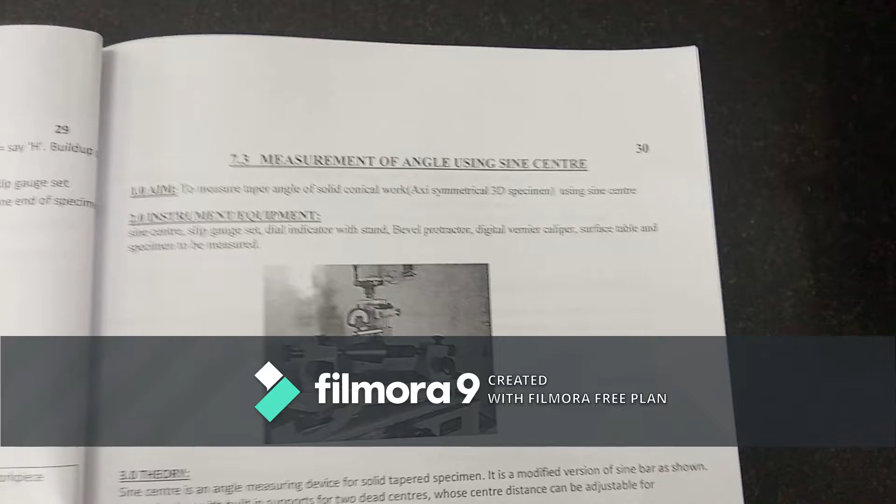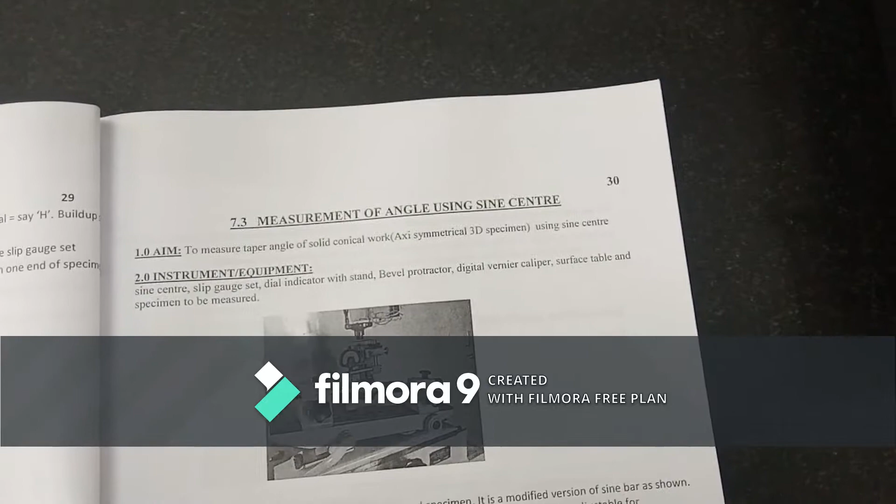The aim of this experiment is to measure the taper angle of a solid conical work specimen using the sine center.

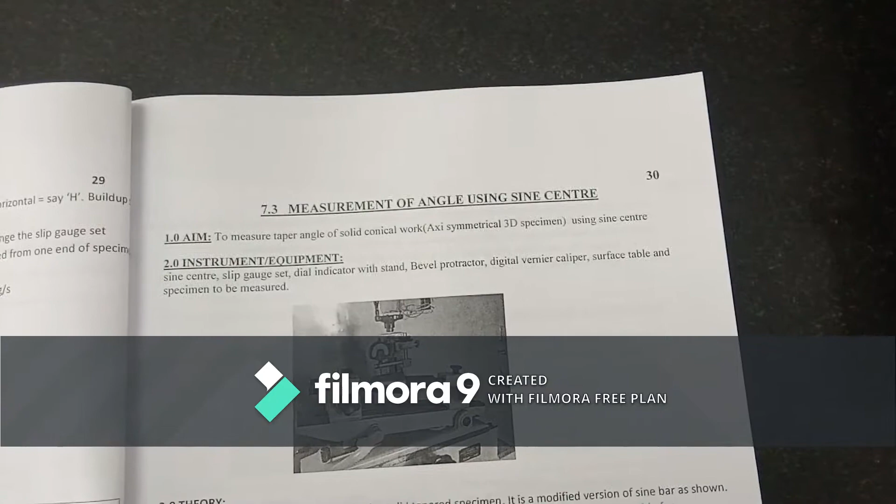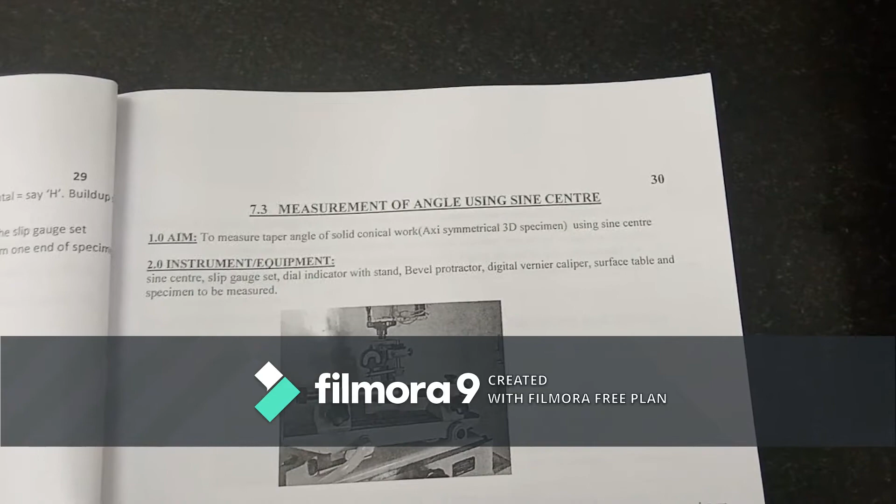The equipments used to measure the angle are: sine center, slip gauge set, dial indicator, bevel protractor, digital vernier caliper, surface table and the specimen. These are the instruments we are using to find the angle.

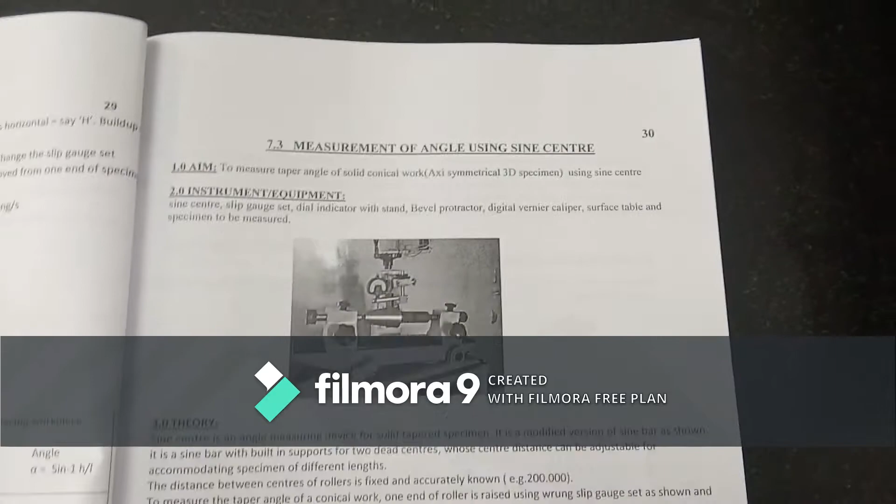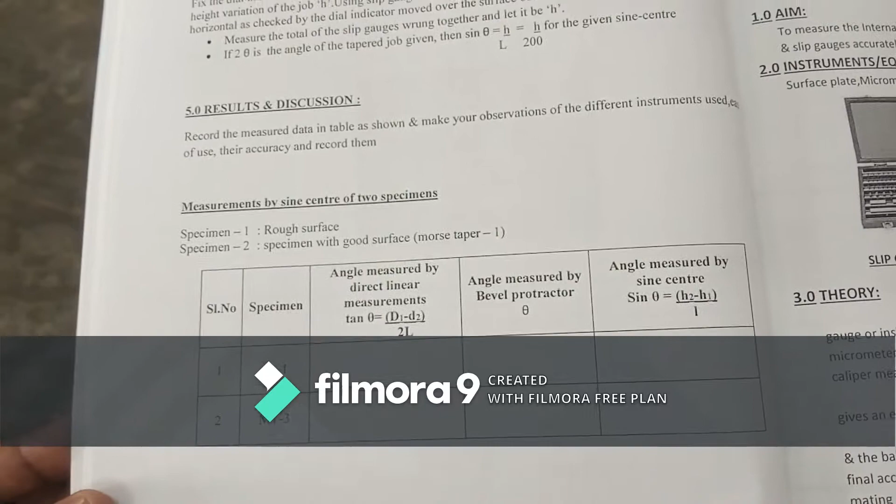Now we move on to the tabular column. The first column has the serial number, the second column is for the specimen, where you need to draw a sketch of the type of specimen you are using.

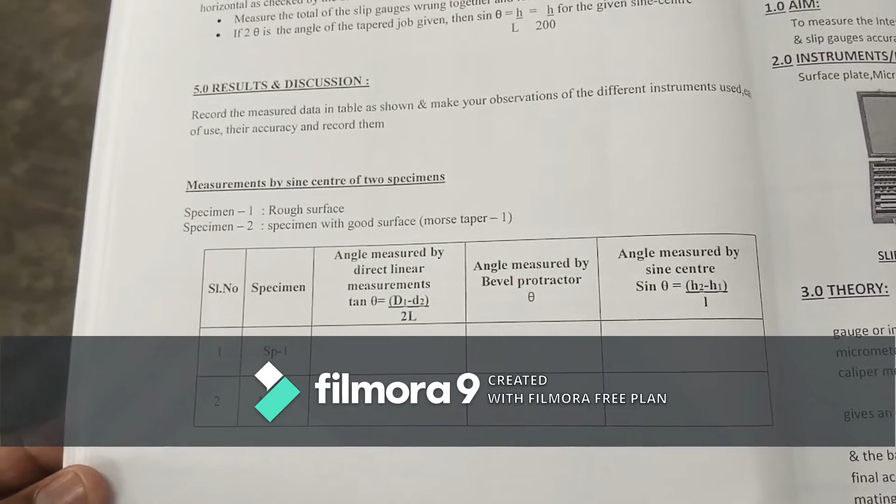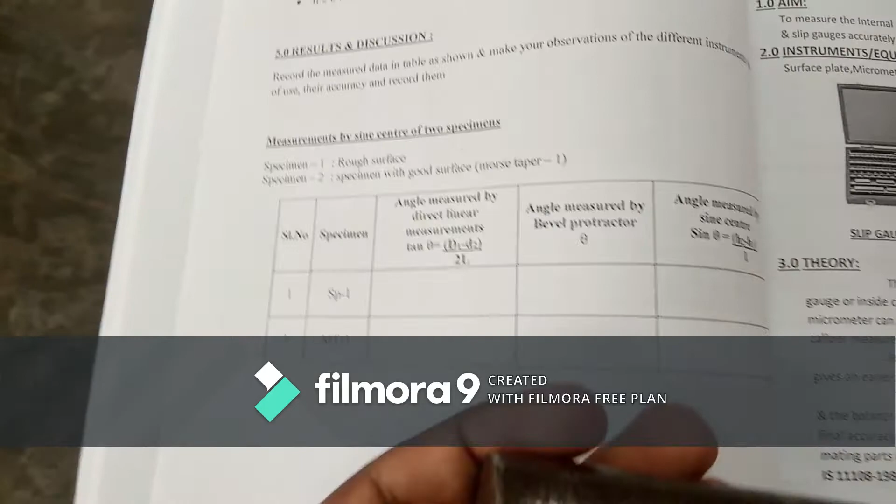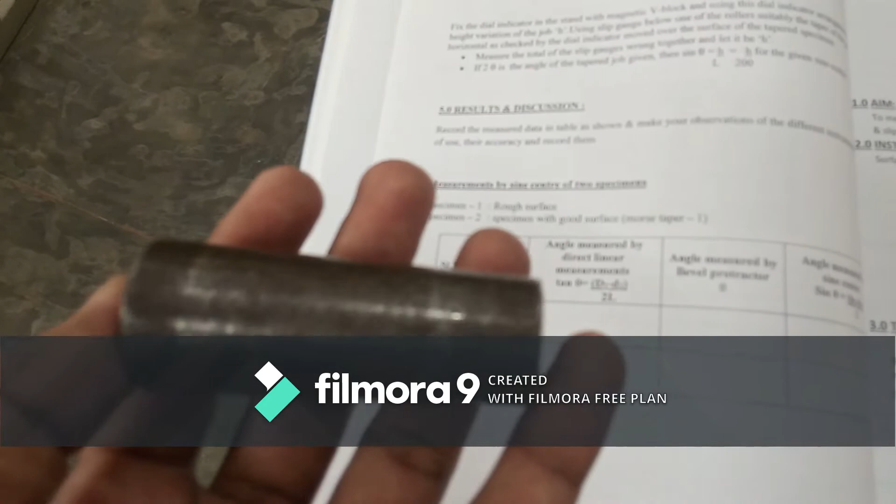The third column is the angle measured by direct linear measurements. For this we have a formula: tan theta equals d1 minus d2 divided by 2L. Here d1 is the largest diameter of the workpiece, this side, and d2 is the smallest diameter, this side. L is the length of the tapered workpiece.

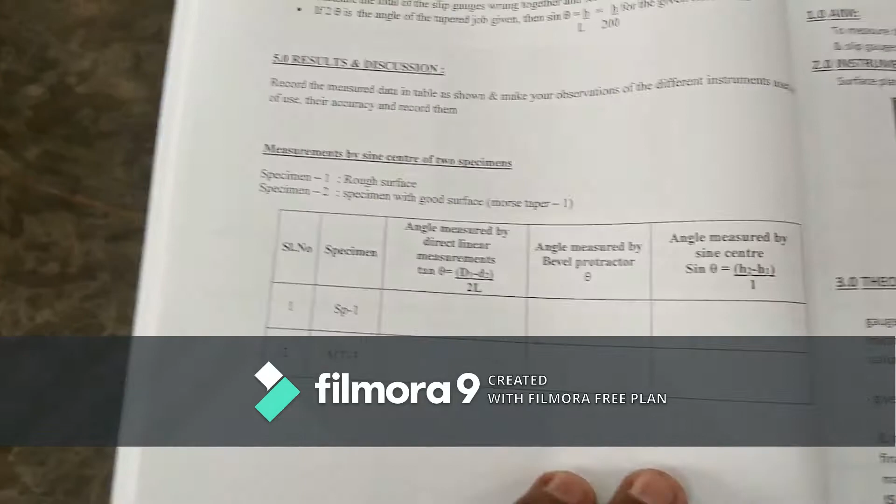Using the formula, first find the angle, then again using the bevel protractor find the angle of the given workpiece. Finally, find the angle using the sine center.

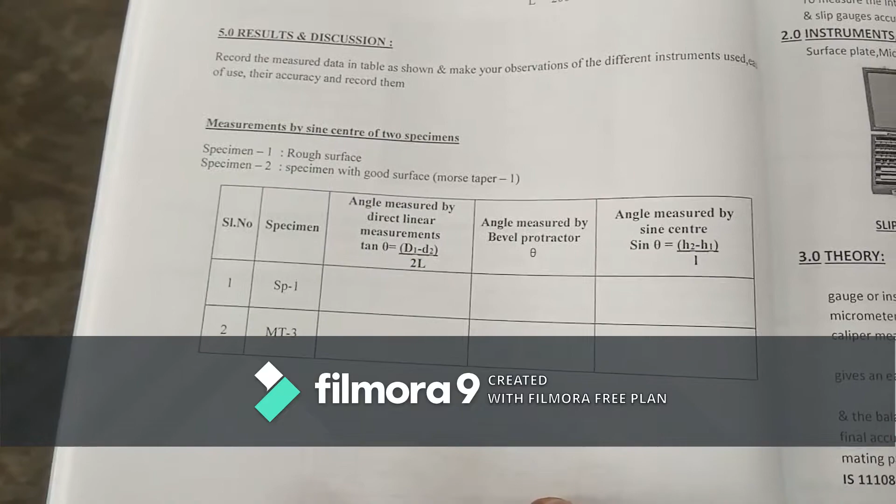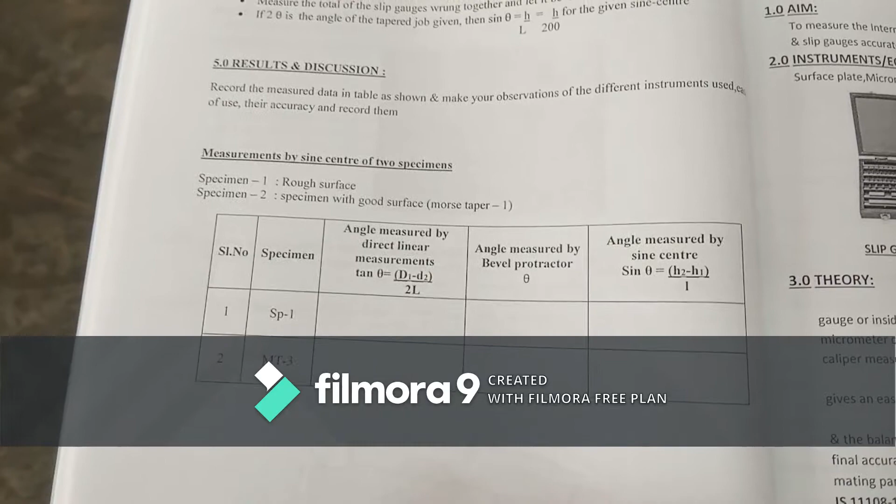To find the angle we have a formula: sin theta equals h2 minus h1 divided by L, or capital H divided by L. Capital H is the height of the slip gauges, and L is the length between the roller centers. That is the formula used to find the angle.

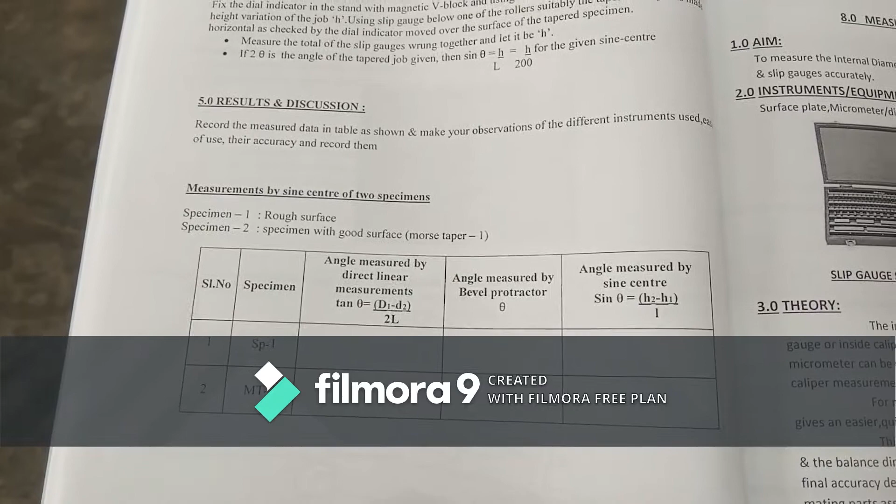Now we will explain how to conduct the experiment using the sine center setup.

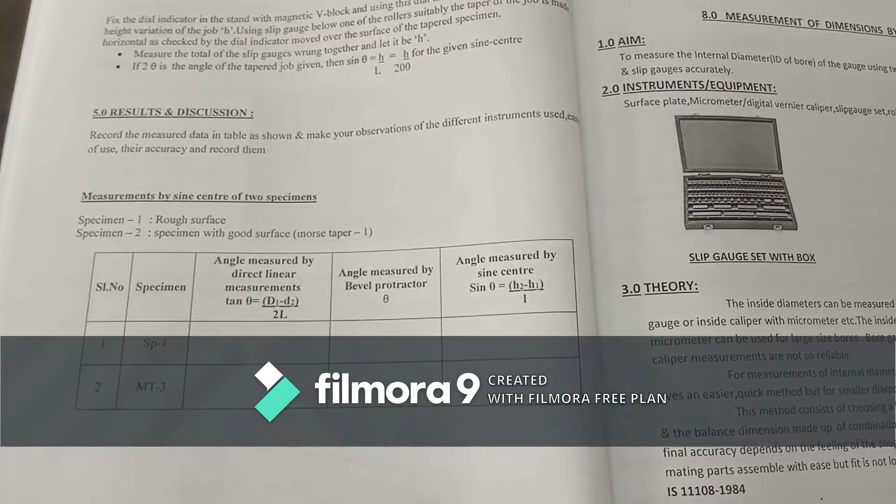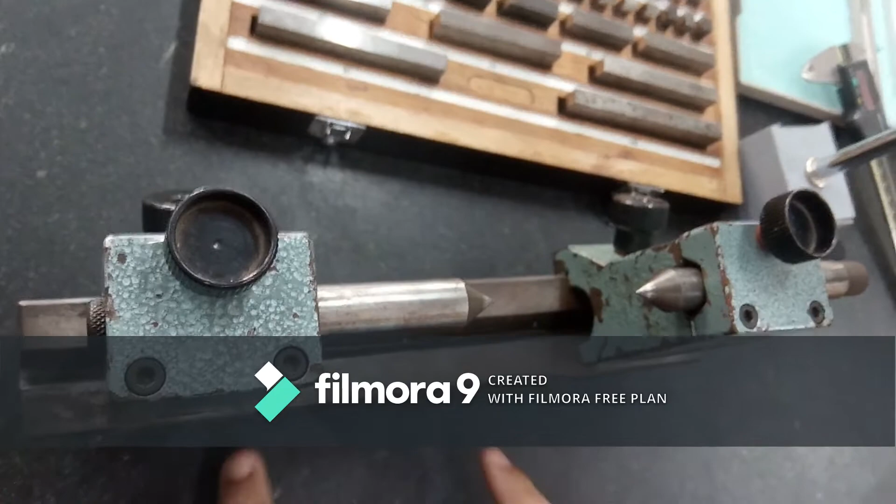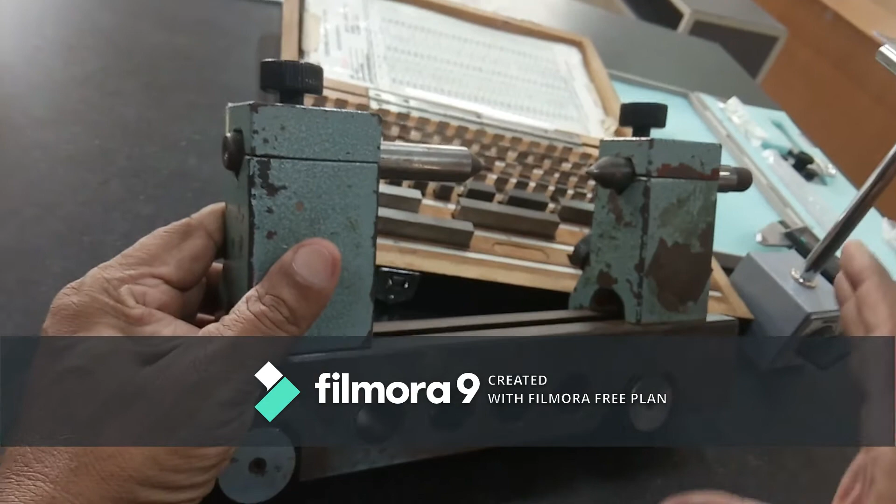This is the sine center setup. We have two dead centers, and in between them we fix the specimen. We have two standard rollers, and the center distance between the two standard rollers is 200 mm. Sine centers are available with 150, 250, and 300 mm lengths, but we are using one with 200 mm center distance.

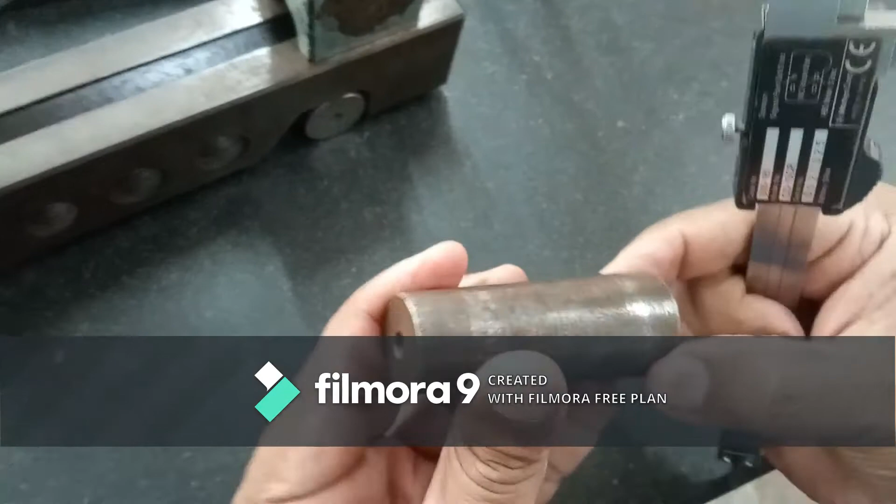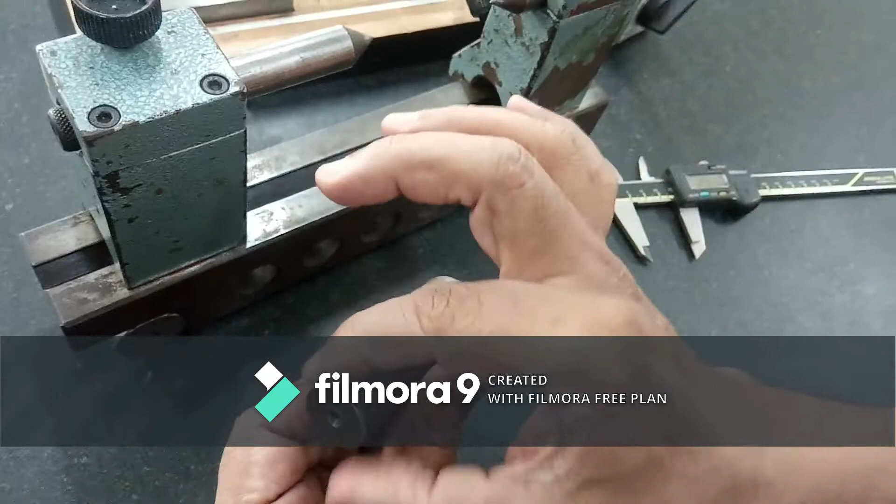First we have to measure the smaller diameter and the bigger diameter using a vernier caliper, and also the length of the specimen. Then we do cross multiplication: for this much length, what will be the difference in diameter? We have to find that out.

So if the distance is x mm for a given length, what about for 200 mm? For this distance the difference in diameter is x; we have to find the corresponding value for 200 mm in the same way.

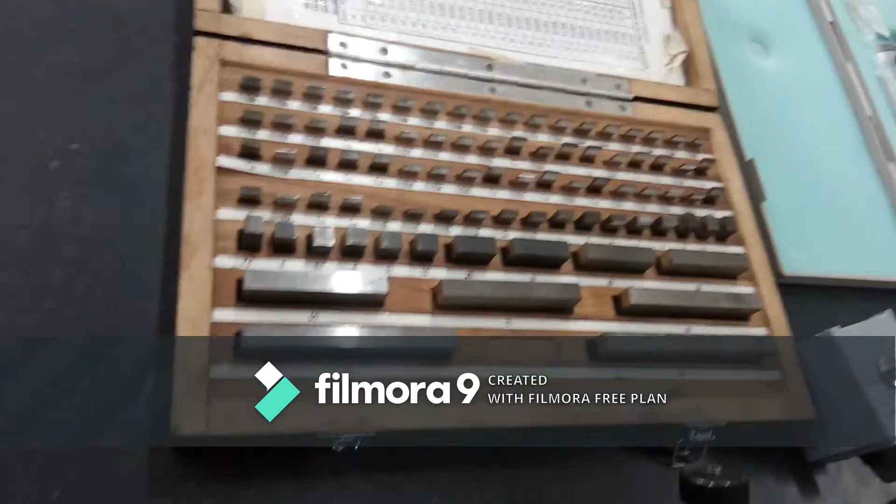After getting the answer, we build the required height using slip gauges. This is the specimen: the maximum diameter is 29 mm, the minimum is 24 mm, and the length is 73 mm.

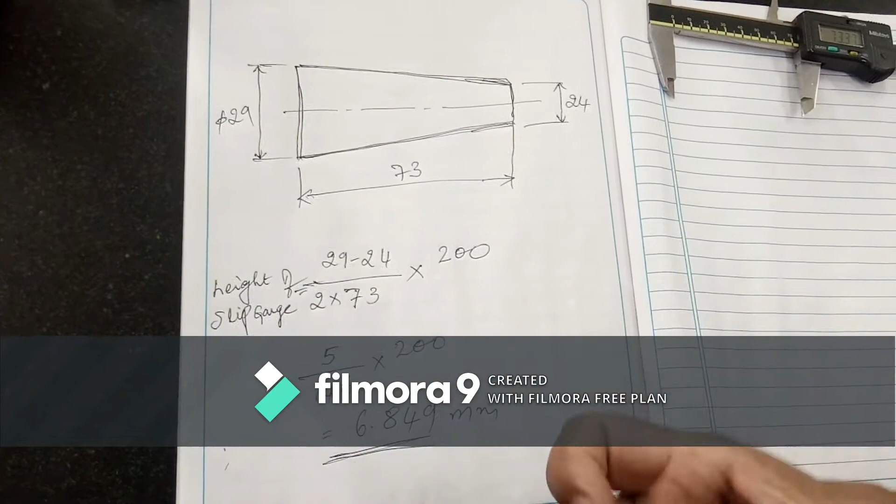We find the difference in diameter: that is 29 minus 24, divided by 2 times 73 (the length of the specimen), multiplied by 200, the center distance of the sine center. This gives 5 by 146 into 200, resulting in a slip gauge height of 6.84 mm.

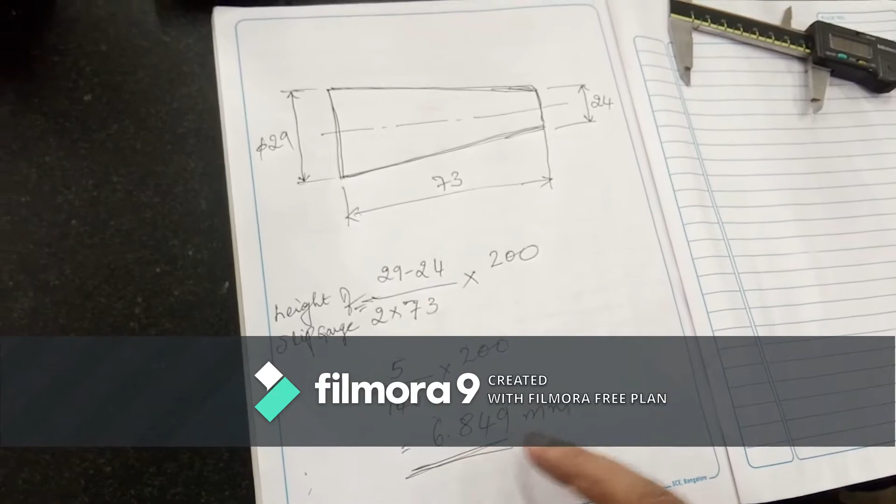So we have to build 6.849 mm using slip gauges. Fixing the specimen in between the two centers like this, and building the slip gauge height of 6.84 mm.

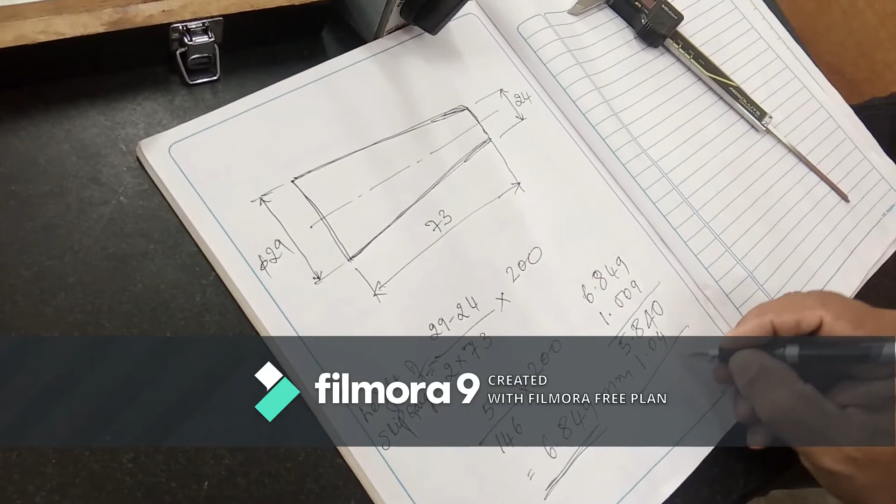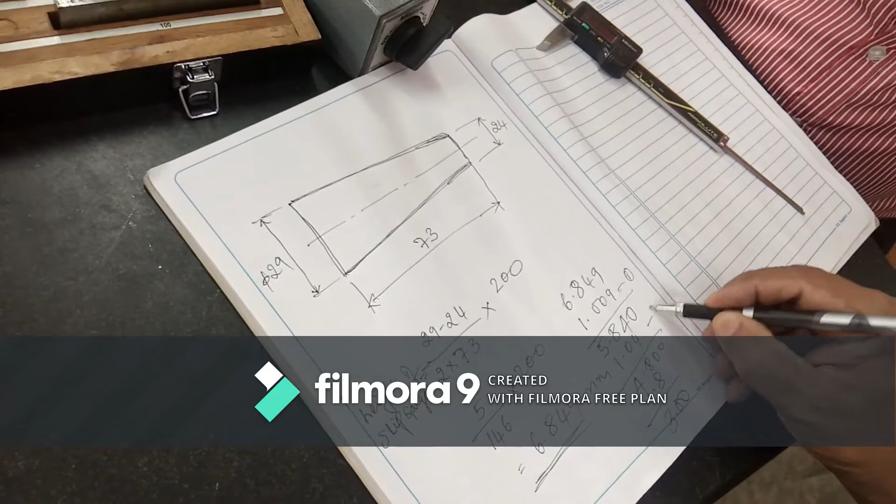So 6.849 mm means combining slip gauges of 1.009, 1.04, 1.8, and 3 mm. By building all these four together, we get 6.84 mm.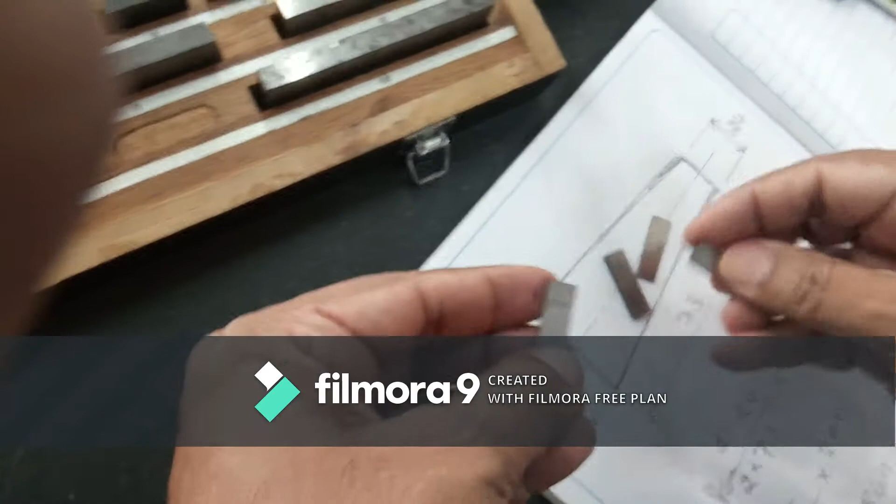This process of building one slip gauge above another is called ringing of slip gauges.

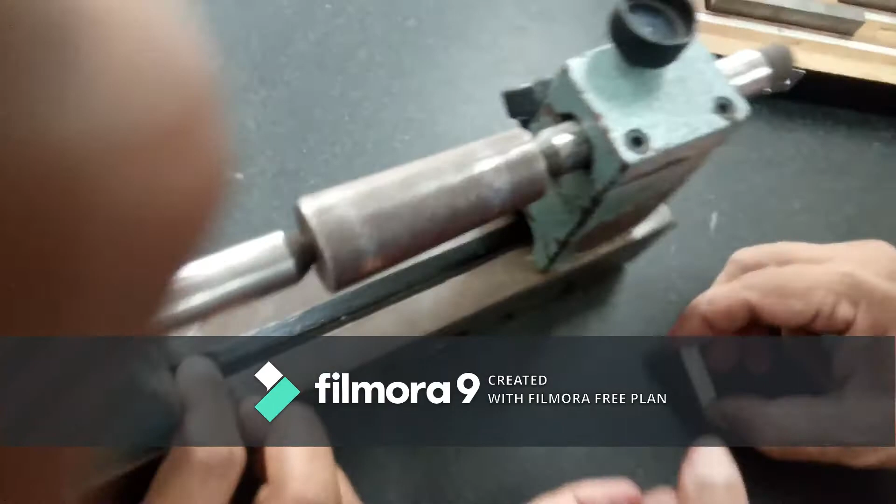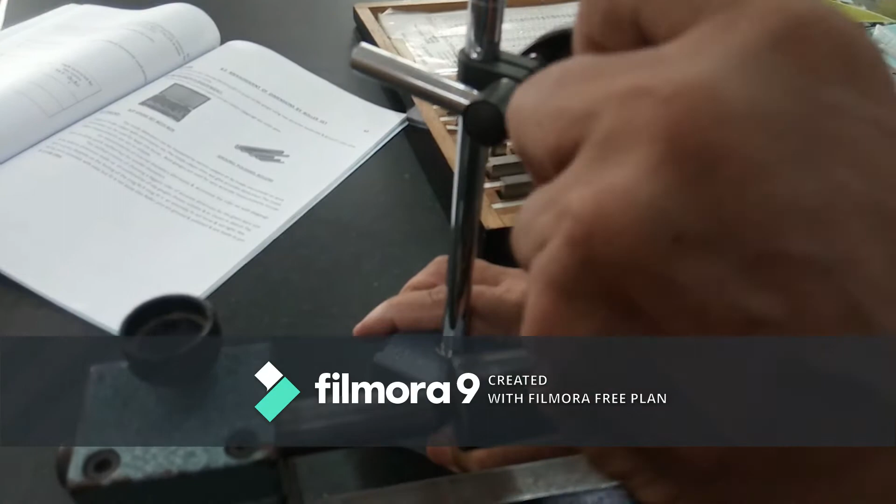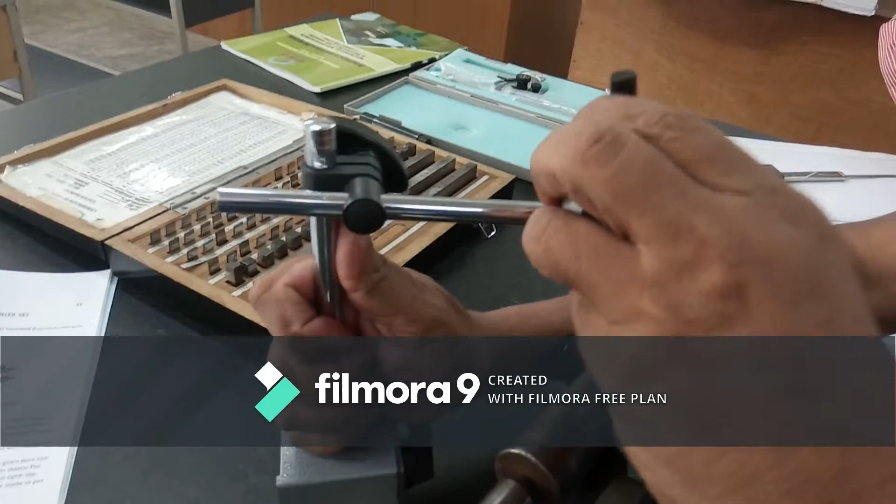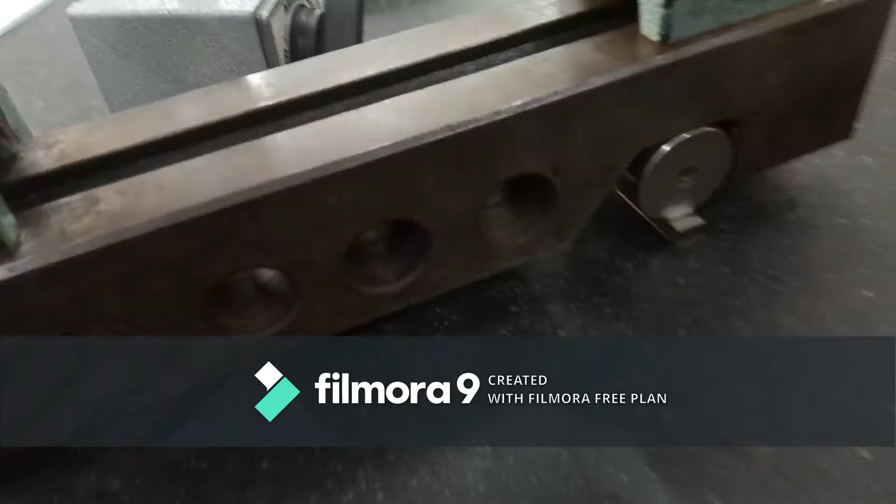Now keep this slip gauge below one roller. Take the dial indicator, build the required height using slip gauges, keep the slip gauges below one roller, and place the dial indicator at the end point, setting it to zero.

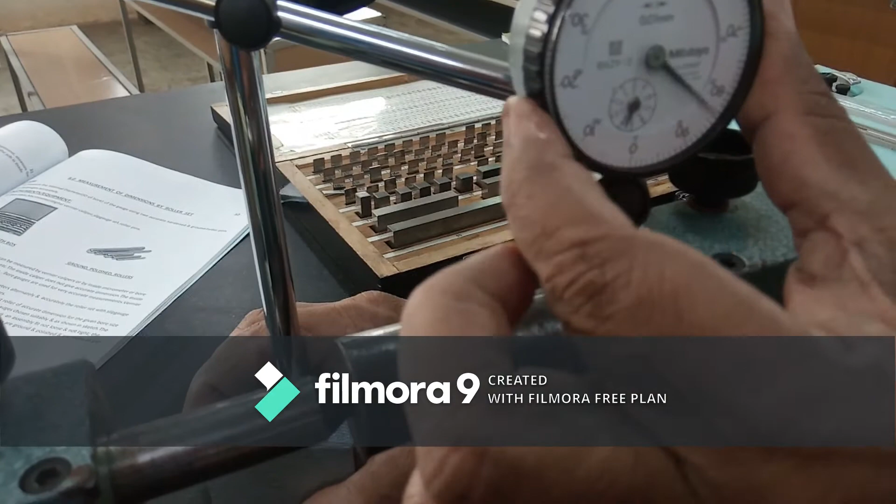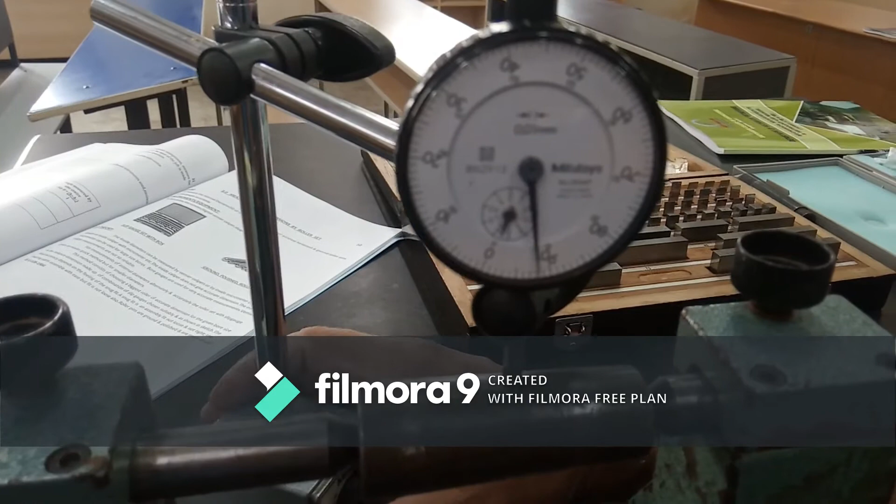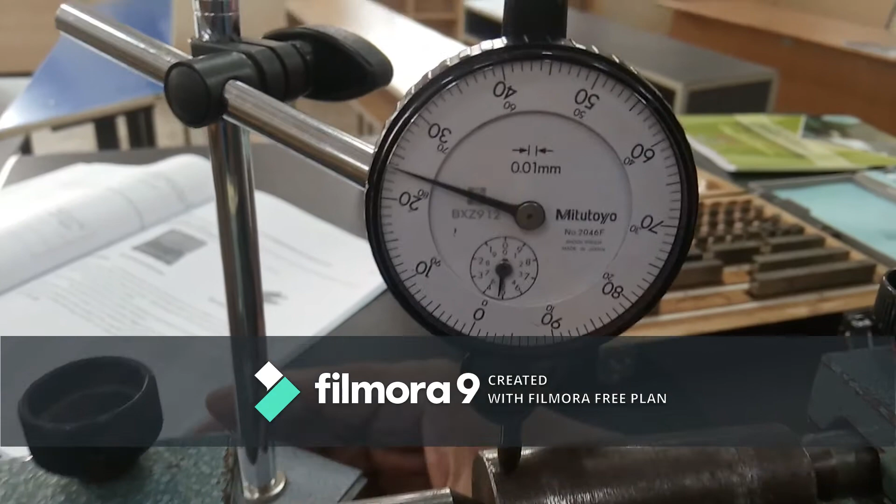Move the dial indicator towards the bigger diameter like this. Now find the difference in height: it is 0.24 mm.

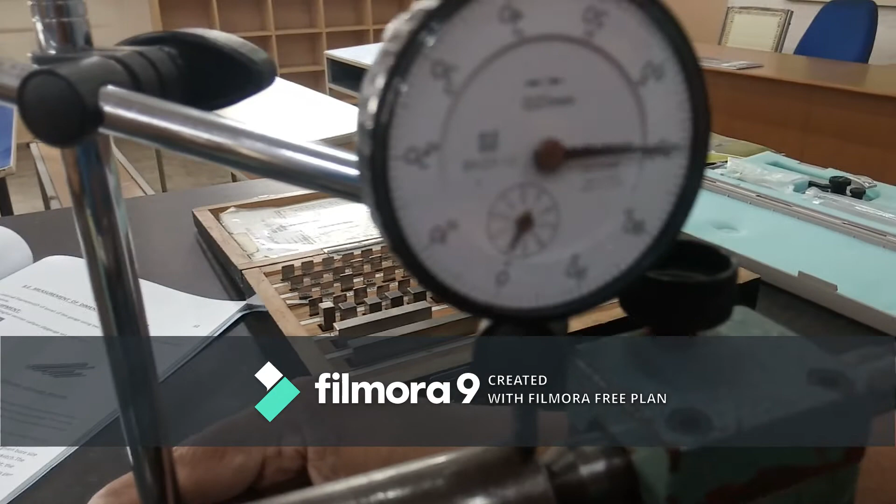So now it is set to zero. If you move the dial indicator towards the bigger diameter exactly at the center, it gives a difference of 0.24 mm.

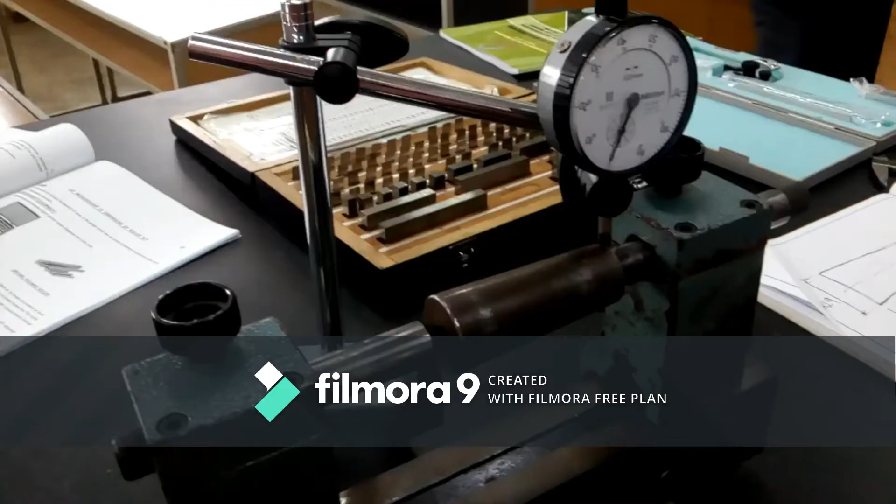So again you build the height of 6.84 mm using slip gauges.

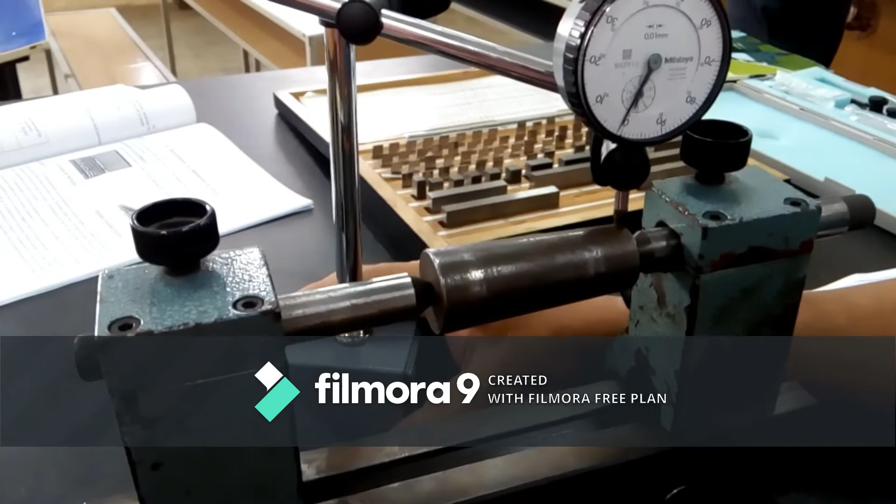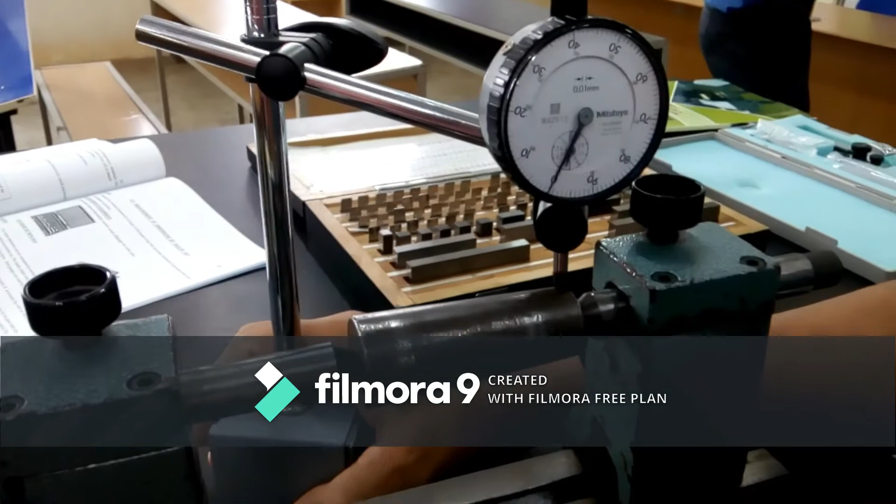Keep the slip gauges below one roller and take the dial indicator. Keep the dial indicator plunger at the smaller diameter side and set it to zero. Then move the dial indicator towards the bigger diameter, exactly at the axis, and find the difference in height.

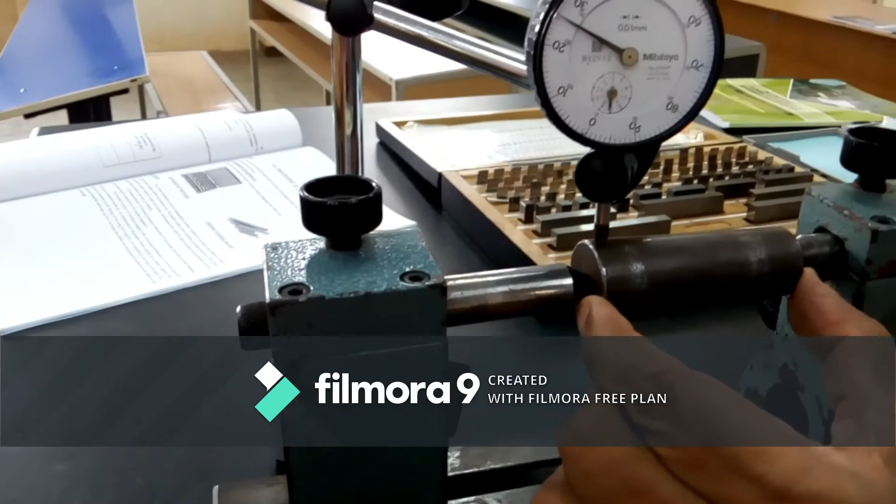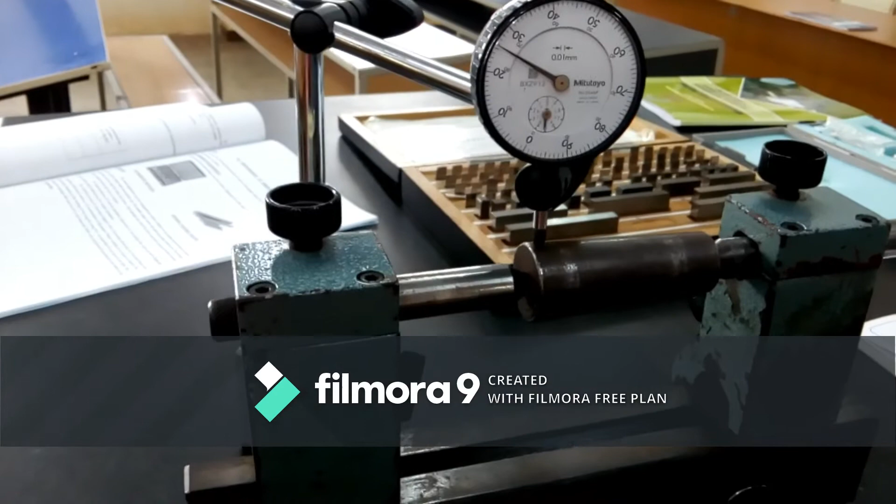It gives 0.25 mm difference. So for this 73 mm length, after keeping the slip gauges below the roller, we get a 0.25 mm difference.

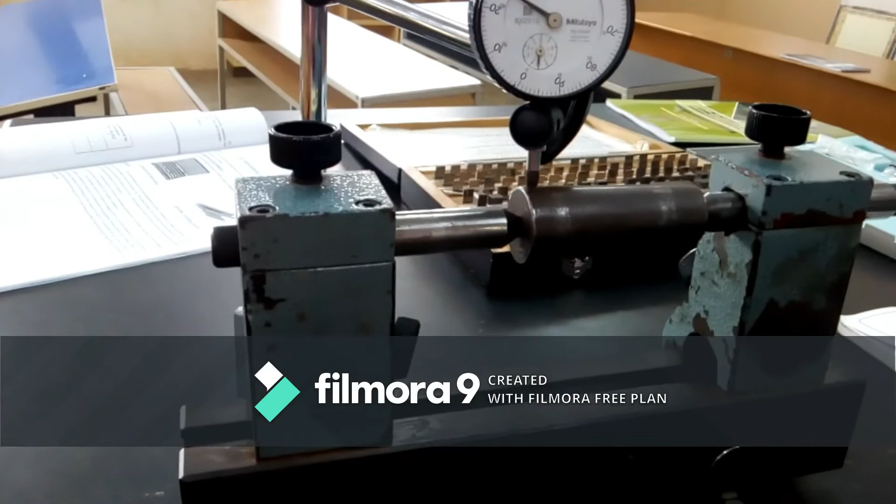What about for 200 mm? We have to again calculate using cross multiplication. Whatever answer you get, you add to the initial dimension of 6.84 mm.

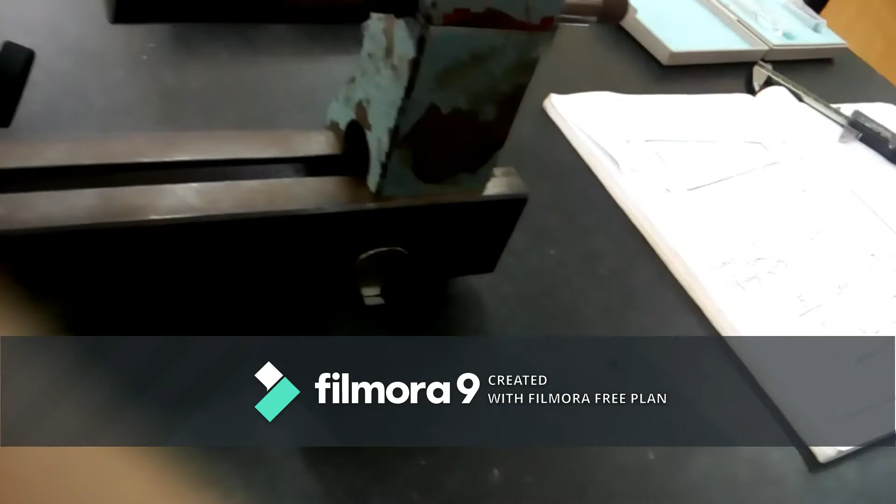Again you build the height using slip gauges. Using the dial indicator, you have to make sure the top surface of the specimen is parallel to the surface plate.

Until getting a zero reading, meaning the surface is parallel to the surface plate, we have to build using slip gauges. When we finally get zero at both the minimum diameter and maximum diameter ends, that height will be H.

By using the sine formula, we have to find out the angle of the given specimen.

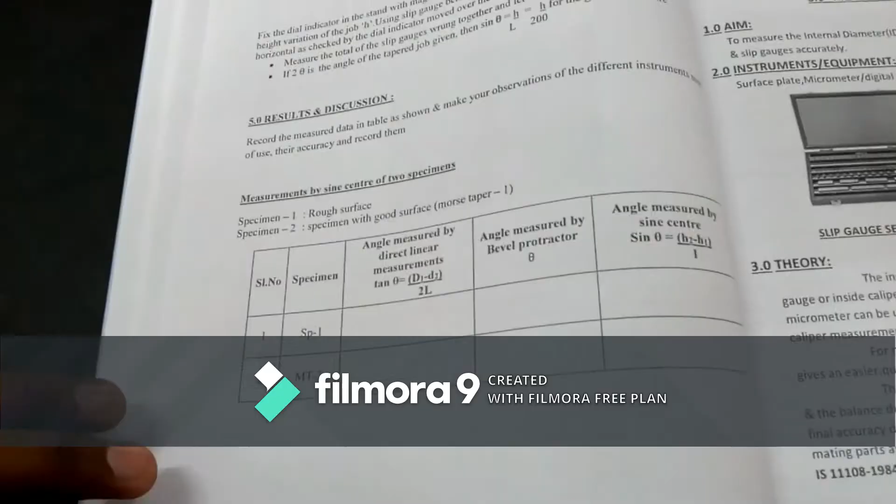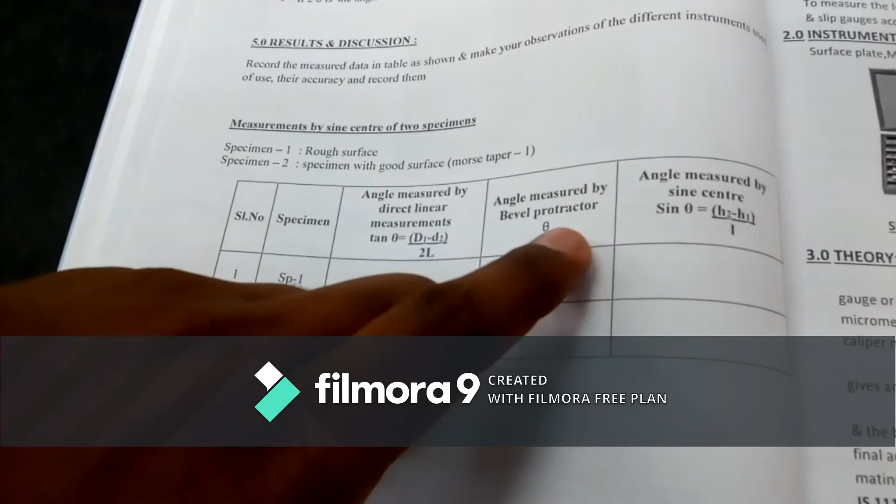From the experiment, you have obtained D1, D2 and L. Now substitute the values in the formula to get the angle theta. Then also use the bevel protractor to find the angle, to cross check whether we have done it correctly.

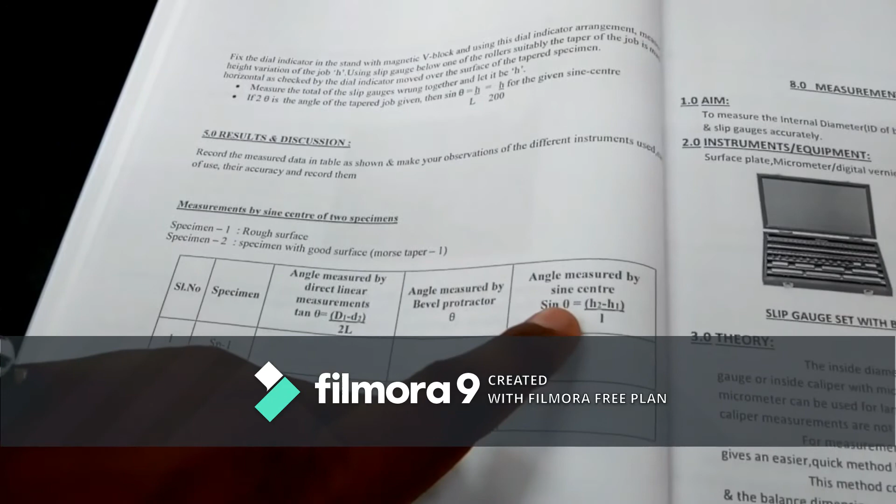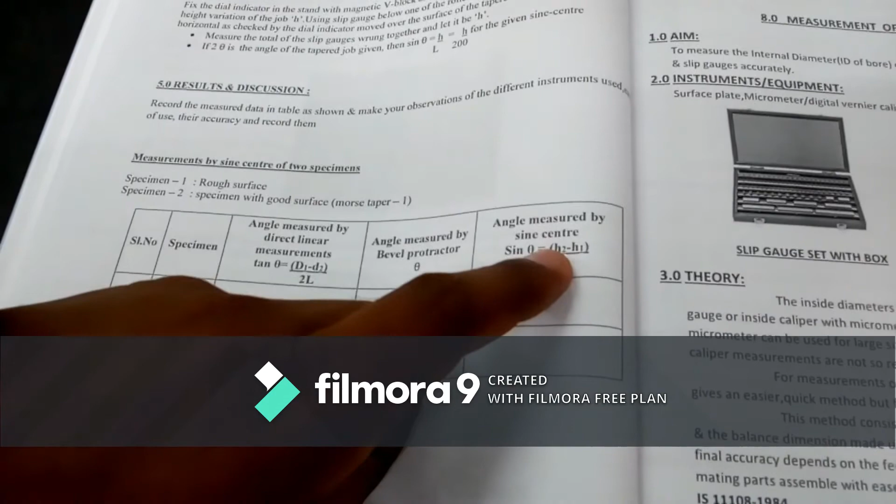Finally, find theta again using the sine center, with the formula capital H divided by L. Capital H is the slip gauge height, and L is the length between the roller centers, that is 200 mm. Now find the answer and fill it into the tabular column.